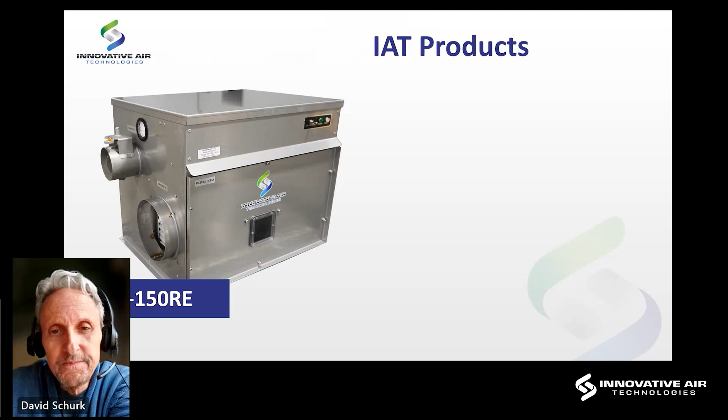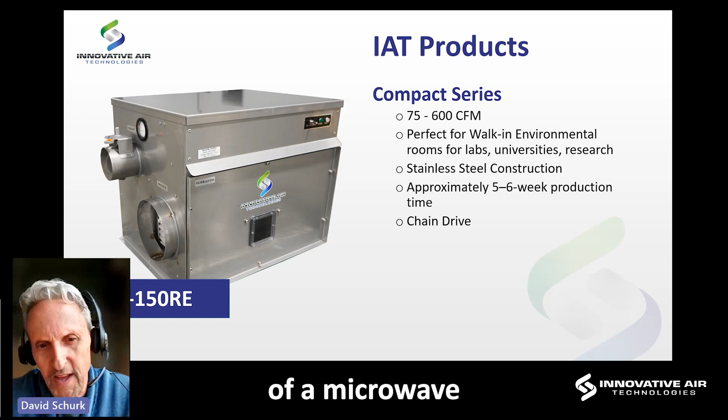Our compact series starts at 75 CFM and is available in increments of 75, 150, 300, and 600 CFM. It is small—the smallest unit is about the size of a microwave oven, and the largest unit is about the size of a traditional under-counter refrigerator, like you might put in a dorm room.

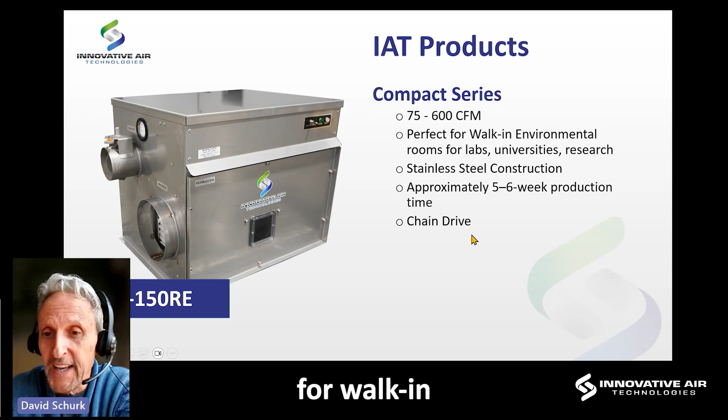It's basically for walk-in environmental rooms, labs, universities, research facilities, and stuff like that. But it's also great for retrofitting and fixing jobs. I'll show you an example in a slide that follows.

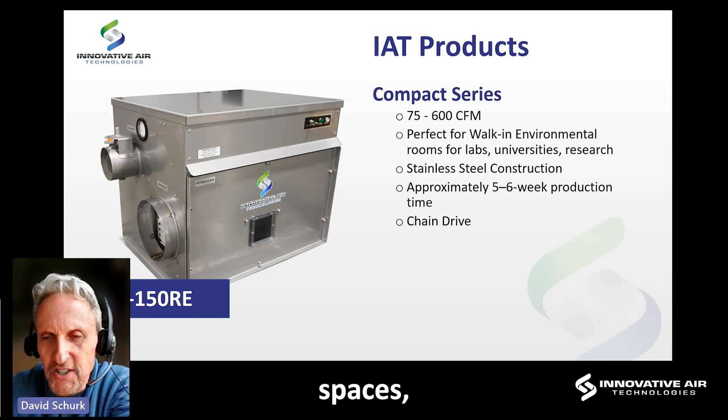Electric heat only. It is either indoor or outdoor, typically installed on the roof, in interstitial spaces, or in the space itself. Regardless, there are multiple ways you can mount it.

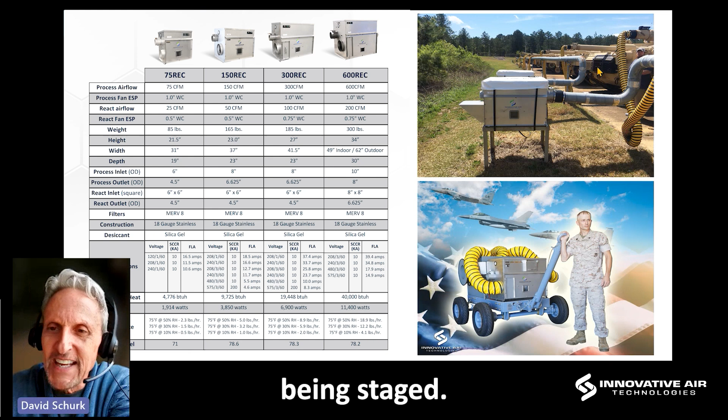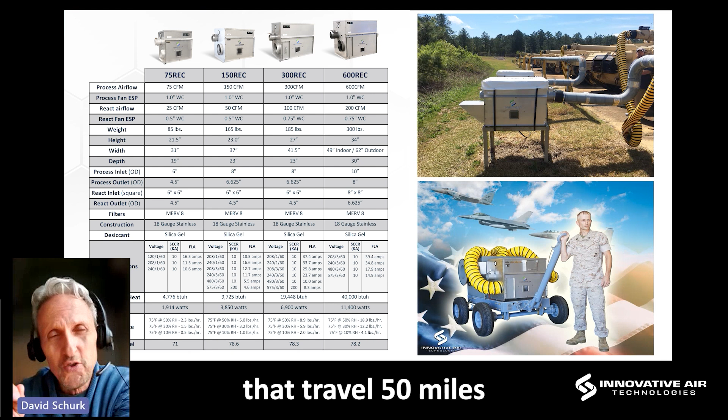Here's an example of the military using it to flush dry air down the main guns of Army tanks that are being staged. The dry air helps keep the main gun barrel rust-free and free of corrosion. It helps keep the turret free of corrosion, and it helps keep the sensitive electronics in the turrets—that fire the missiles that travel 50 miles and drop down somebody's chimney stack—from degrading and having issues, keeping them functioning at their full capacity.

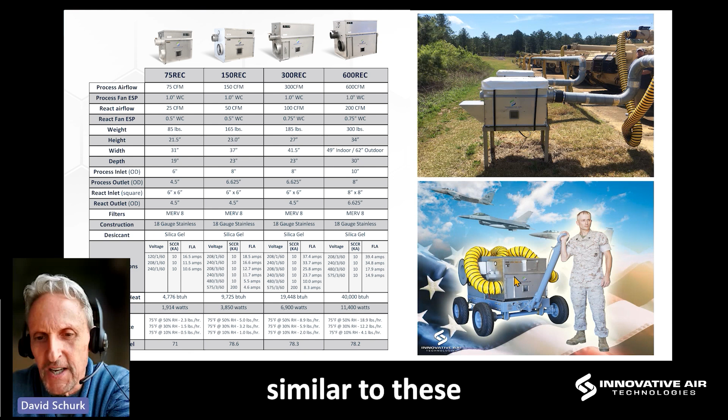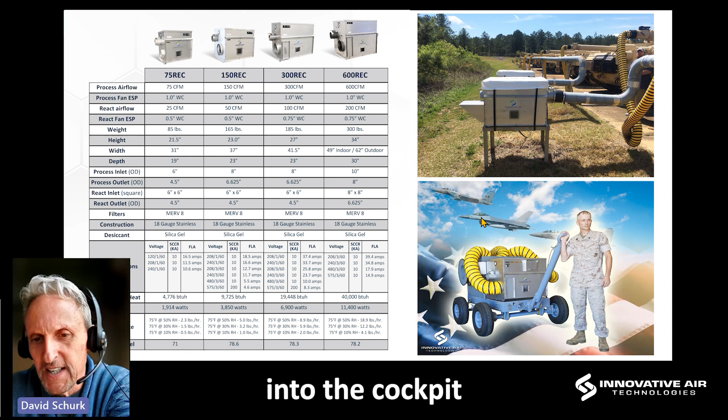A lot of times we will provide desiccant units similar to these on aircraft carriers. When fighter jets fly into the aircraft carrier out in the middle of the ocean, they'll run a very small diameter, high pressure hose of desiccated air into the cockpit to keep the cockpits free of moisture and keep the sensitive electronics dry until they turn the key and want those fighter jets to take off again.

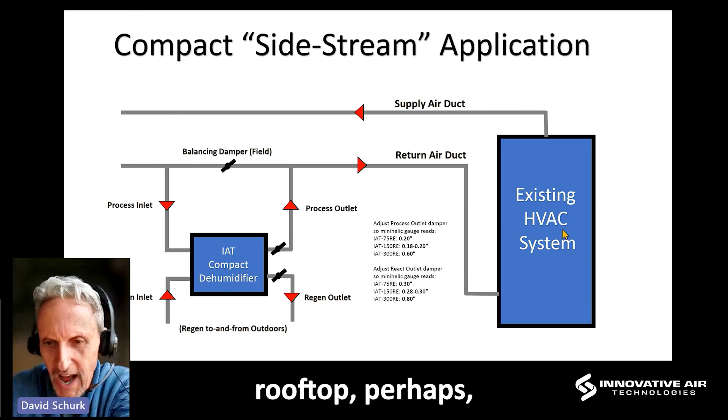Here's an example of using it side-streamed instead of in series with an existing HVAC system—perhaps a packaged DX or chilled water rooftop unit, maybe a 7.5, 10, 12.5, or 20-ton unit—that just can't cut the job from a standpoint of dehumidifying the space properly.

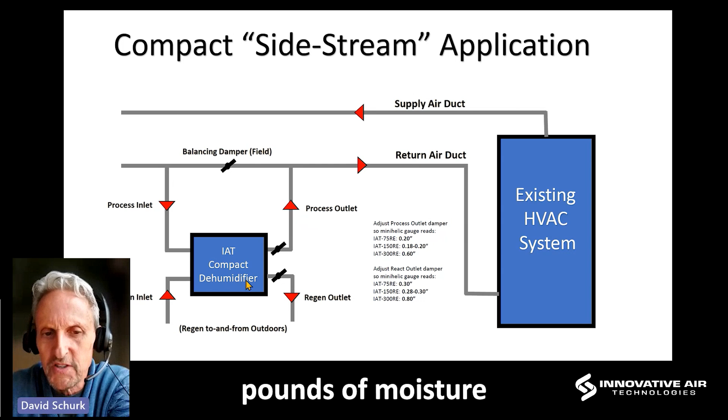We will side-stream and bring in 75, 150, 300, or 600 CFM of air to this unit and remove 5, 10, 15, or 20 pounds of moisture per hour from the air, pump it back into the inlet of this unit, and offload a whole bunch of latent capacity so this unit can now function more sensibly and do a better job maintaining the conditions in the space.